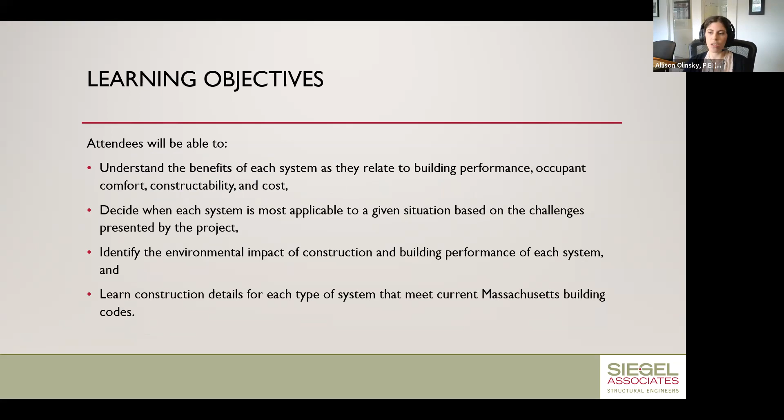So the learning objectives from this presentation are that you're all able to understand the benefits for each system as they relate to building performance, occupant comfort, constructability, and cost. You'll also be able to decide when each system is most appropriate for a given project based on the specific challenges presented. You'll be able to identify the environmental impact of construction and also the final building performance of each system. And you'll also learn some construction details that are code compliant.

So one challenge that you might encounter in building design is creating well-insulated and acoustically separated spaces in a cost-effective way. And one solution is insulated concrete forms, or ICFs. Show me by way of the Zoom thumbs up reaction, or just wave your real human hand around, if you've heard of ICFs. So I've got maybe 3 out of 10 or 20 on here, 4, 5. So maybe we're up to like 8 now. All right, not bad. But I'm here to raise that ratio. I'm wondering how many of you have also designed a building with ICFs before? Give me another thumbs up.

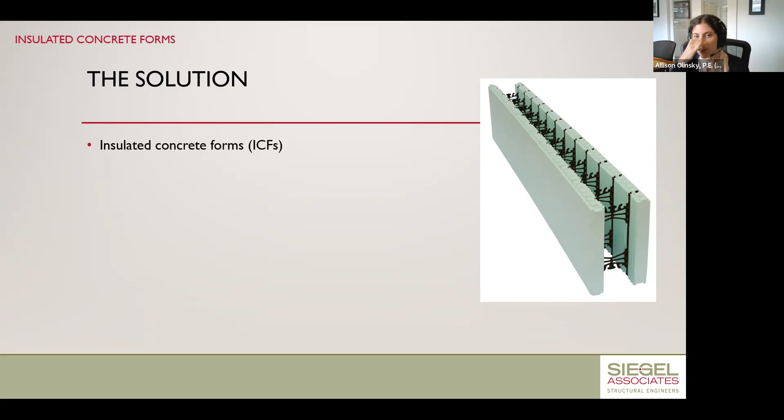So what are ICFs? ICFs consist of 2 layers of foam connected by plastic webs, and then cast-in-place concrete is poured in between them. And I'm calling the foam forms, but they stay in place for the life of the structure, providing insulation and also your air and vapor barrier.

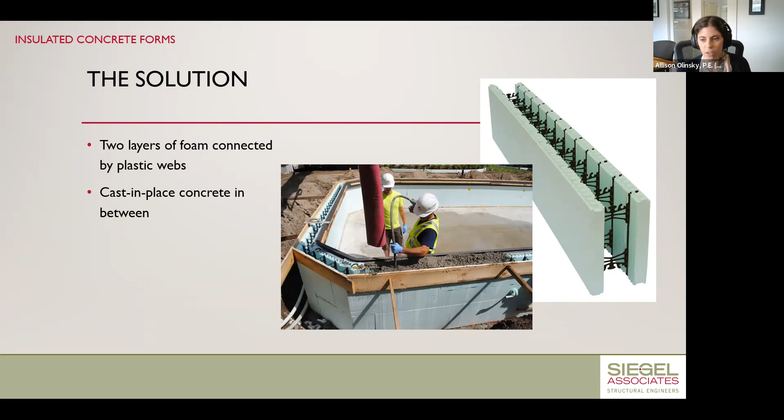I've mentioned some of these benefits already, like the excellent insulation. The foam alone provides about R23, and you can get much more than that with the whole concrete and foam assembly taken monolithically. Regarding acoustics, the concrete mass and foam insulation, especially the concrete though, provide very quiet spaces that are well acoustically separated from the outdoors and also from adjacent rooms or apartments if you were to use this as an interior bearing wall in multifamily residential buildings.

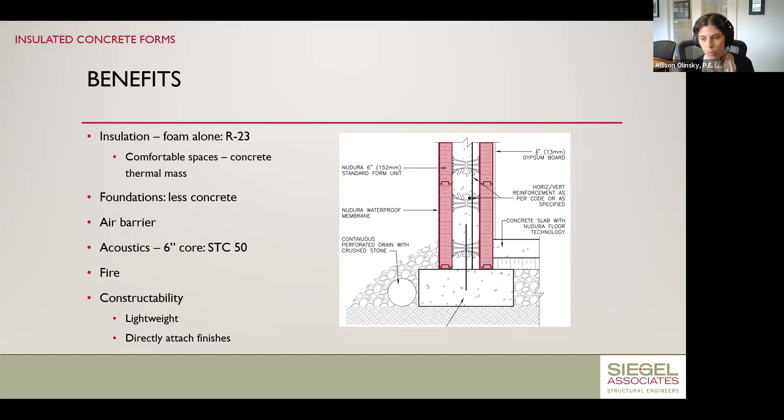So I'm sure that this table means a little bit more to you than it does to me, but with a 6-inch concrete core, you can get an STC rating of 50. It's also easy to achieve a 2-hour fire rating with this construction.

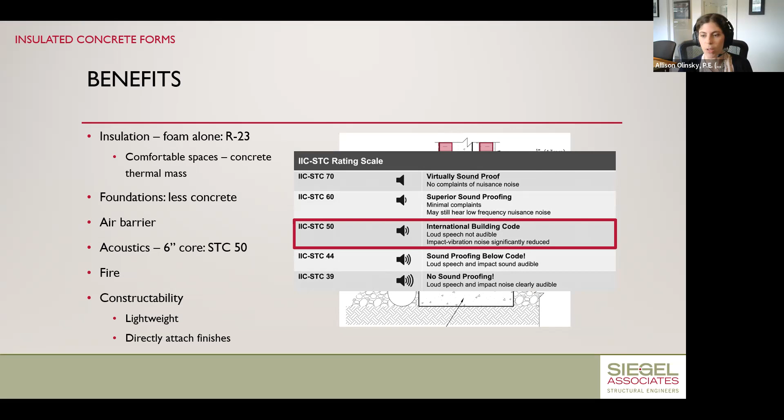And I want to touch on some of the constructability benefits. The forms are lightweight and can be easily carried and placed by one person. The forms made by Nudura, which is just one major manufacturer that we've worked with, are 8 feet long instead of the more standard 4 feet, but they're still so lightweight because it's just foam with some embedded plastic webs, so it can still be easily carried by one person.

Nuduras in particular are also completely reversible, meaning you can install them upside down or backwards any which way, and they all interlock with each other with the embedded plastic webs. And we're not Nudura reps, but they have a large market share locally and they're easy to engage with and they have very strong technical support, but there are other suppliers out there.

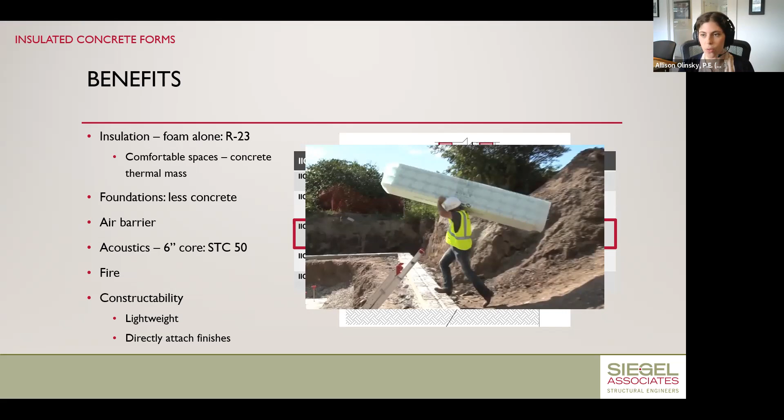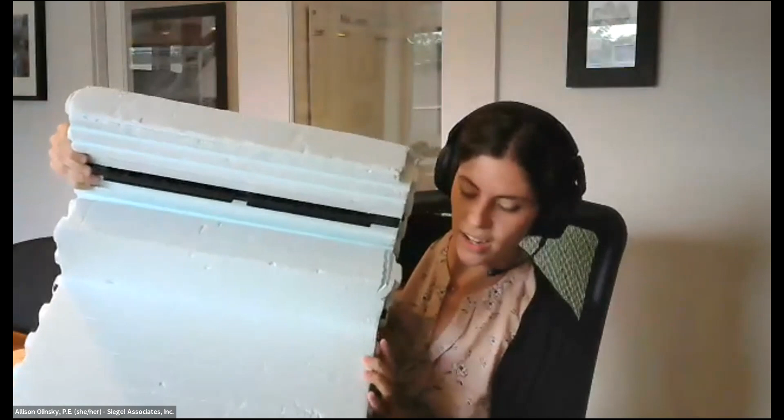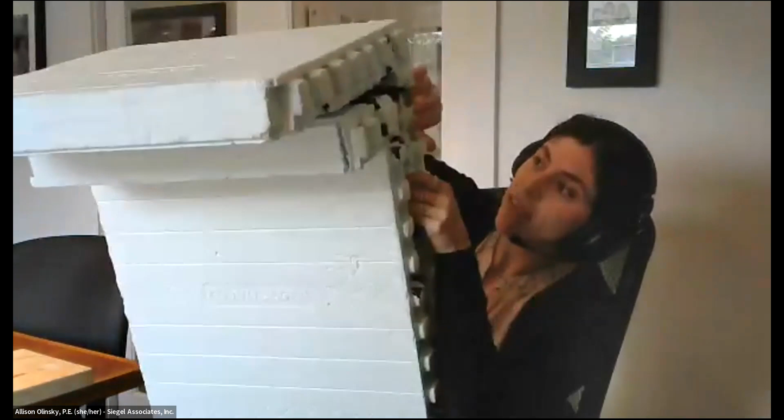So I have a block to show you. I'm going to stop sharing my screen for a moment. All right, so this is a corner block because I couldn't fit an 8-foot block into this office. This is the corner and they all come collapsed and then they fold out. Let's see if I can do this. They just fold out like this. Nifty, right?

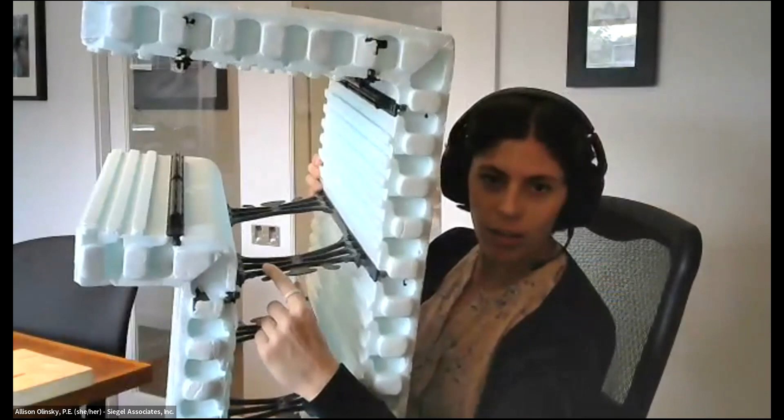You can see these foam nubs, and they're used so you can interlock one on top of the other when you stack them like Lego blocks. These are the embedded plastic webs that you're seeing. Let's see if I can get more of a close-up. I'm holding it upside down. Or as I said, there is no such thing as upside down. So you can see that the webs are symmetrical. So this is the bottom one, but then the top one in the back is the same.

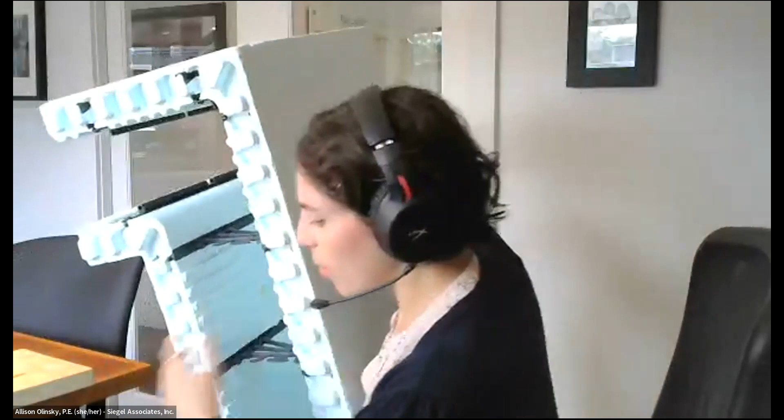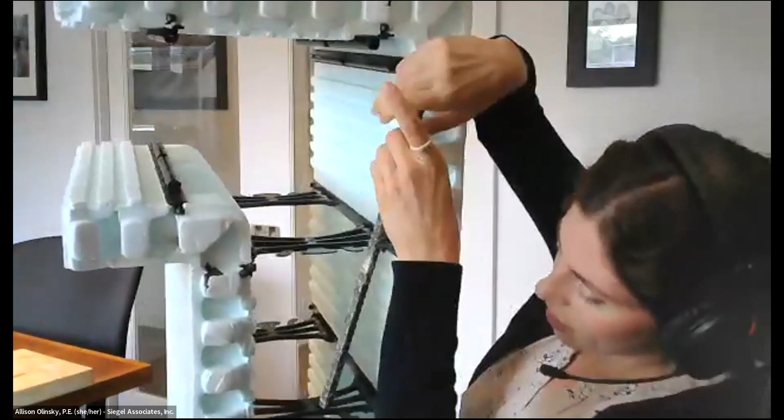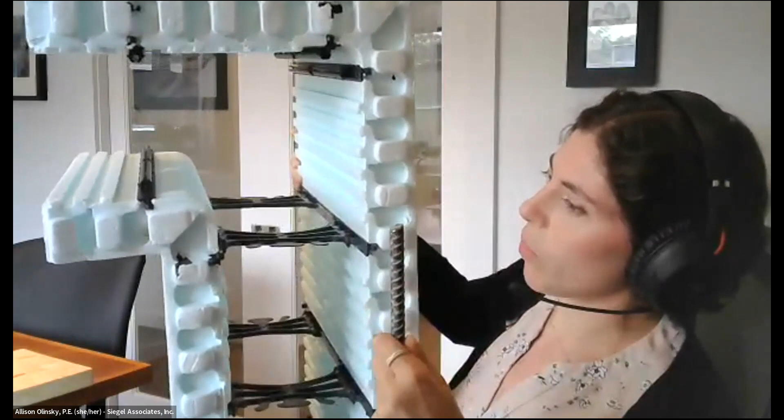So the nubs are for installing the horizontal rebar. So I've got some rebar here. It's much more fun if you could play with it in person. So we got rebar. Can we see this? Yeah. So it just snaps in to the webs. So with your horizontal rebar, you could lay it in alternating. So you would lay the first one here and then on the next higher block, you could lay it right next to it. And then the vertical rebar can just get slid in between them. So it stays up easily.

Okay, I think that's all I want to show you here. Put this guy down. Okay, look at my screen again.

All right, so here is an up close view of the foam. You can see these wavy lines that are stamped in, and those waves correspond with the location of the embedded plastic webs. They're 8 inches on center, so it makes it easy to directly attach your finishes through the foam because you can see where the webs are located. This would include gypsum on the interior, for instance, or brick, wood siding, or stucco on the exterior.

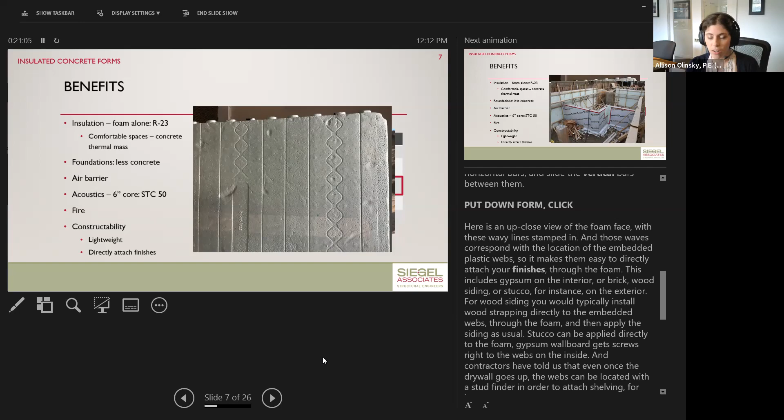For wood siding, you typically install wood strapping, just screw it directly to the embedded webs through the foam, and then apply the siding as usual on top of the strapping. Stucco can be applied directly to the foam, and gypsum wallboard also gets similarly screwed to the webs. And contractors have told us that even once the drywall goes up, the webs can be located with a stud finder in order to attach shelving, for instance.

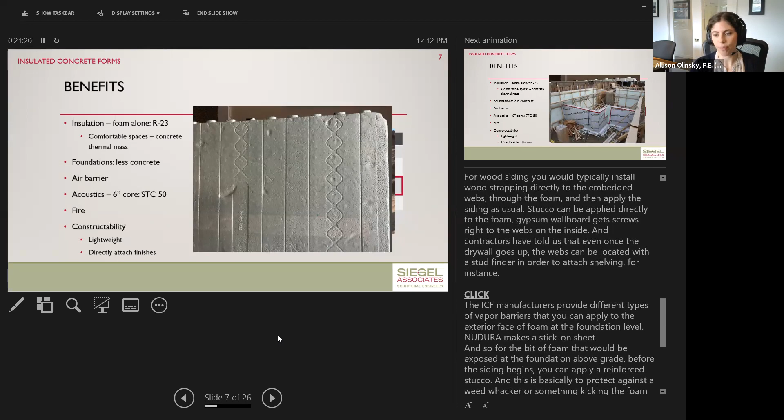The ICF manufacturers provide different types of vapor barriers that you can apply to the exterior face of the foam at the foundation level. I'm not accustomed to seeing any type of vapor barrier being used above grade, but it can be used in that application as well. So Nudura makes a stick-on sheet for the vapor barrier, which is what you're seeing here.

And then you can apply a reinforced stucco for the bit of foam that would be exposed at the foundation above grade. There are a number of different ways you could address it, but that's basically to protect the foam against a weed whacker or something just kicking the foam at that grade level.

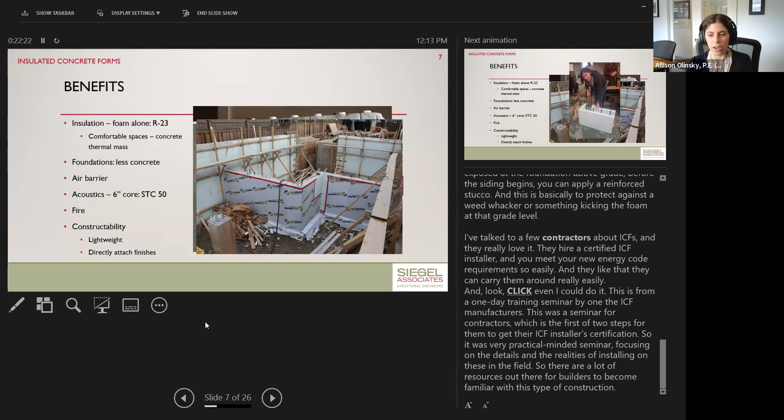I've talked to a few contractors about ICFs and they really love it. They just hire a certified ICF installer and they meet their new energy code requirements so easily. And they like that they can carry them around very easily. And look, even I could do it.

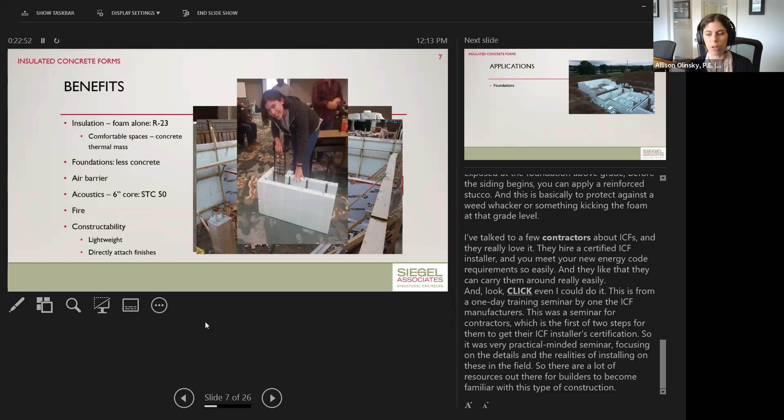This picture is from a one-day training seminar that was put on by one of the ICF manufacturers. And this was a seminar for contractors, so it was the first of 2 steps for them to get their ICF installer certification. So it's a very practical minded seminar focusing on the details and the realities of installing these in the field. So it's good to know that there are a lot of resources out there for builders to become familiar with this type of construction.

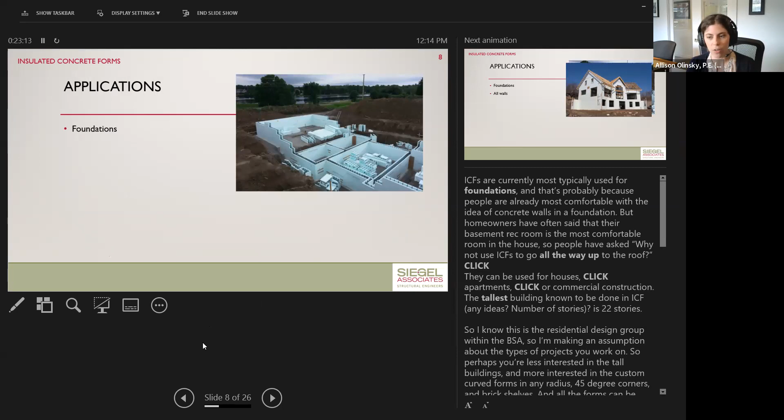ICFs are currently most typically used for foundations, and that's probably because people are already most comfortable with the idea of concrete walls in a foundation, but homeowners have often said that their basement rec room, for instance, is the most comfortable room in their house. So people have asked, well, why not use ICFs to go all the way up to the roof? And that is exactly what we're seeing.

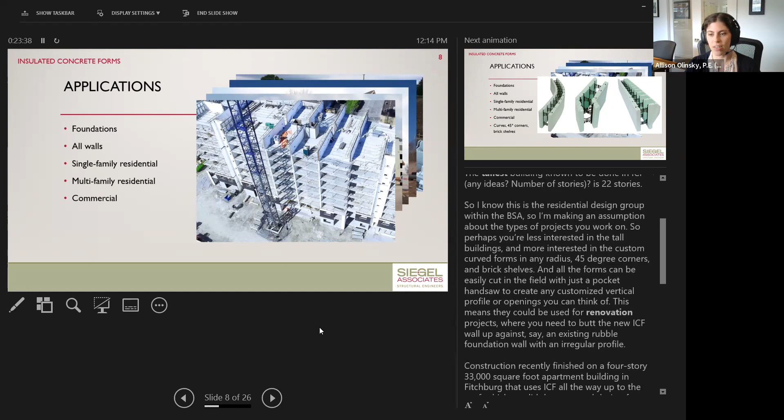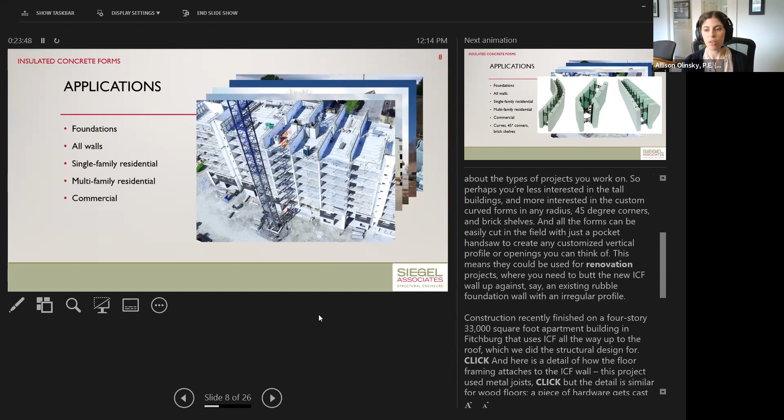They can be used for houses, apartments, or commercial construction. The tallest building to be done in ICFs is 22 stories tall. But I know this is the residential design group within the BSA, so I will make an assumption about the types of projects you work on. So perhaps you're less interested in the tall buildings and more interested in the custom curved forms in any radius, 45-degree corners, and brick shelves.

And all the forms can be easily cut in the field with just a little pocket handsaw, maybe 12 inches long, to create any customized vertical profile or openings you can think of. This means they could also be a good fit for renovation projects where, say, you would need to butt the new ICF wall up against an existing rubble foundation wall with an irregular profile.

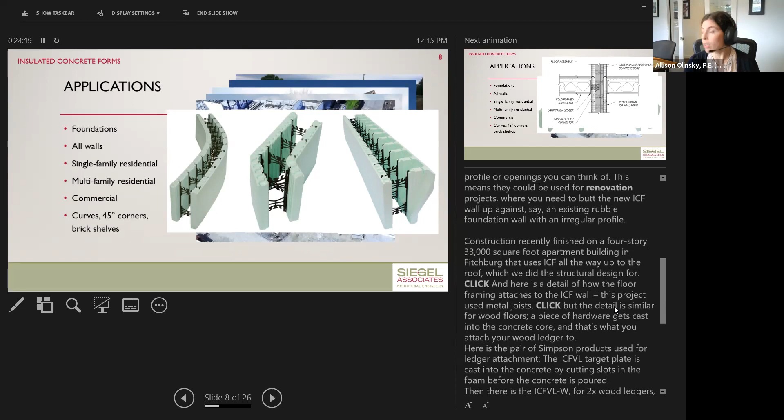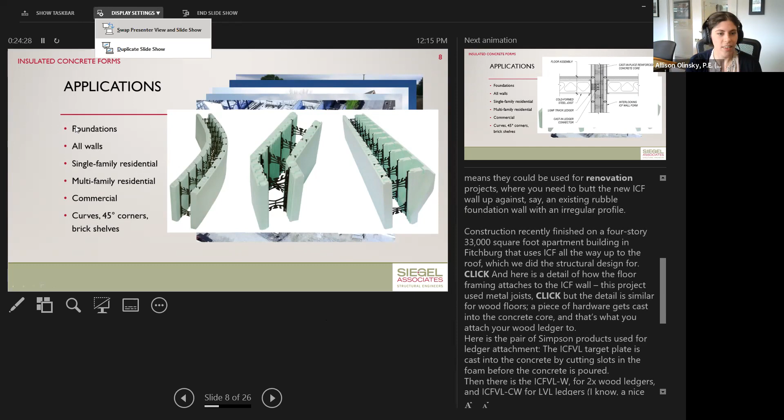Thank you. All right, I was told my script was up. You can see my cheat sheet. All right, here we go.

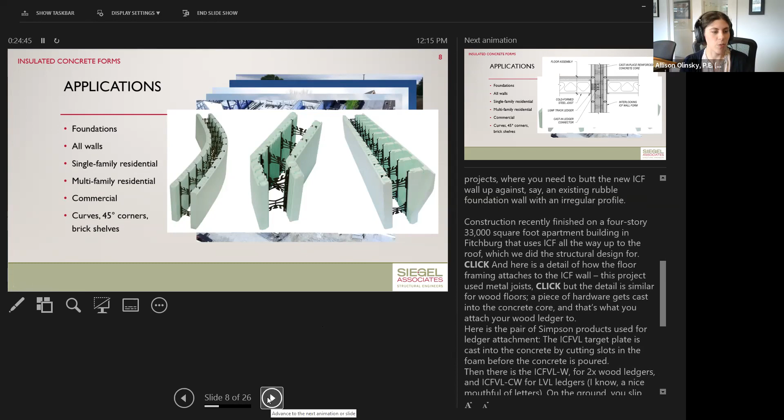So construction recently finished on a 4-story, 33,000 square foot apartment building in Fitchburg that uses ICFs all the way up to the roof. And here's a detail of how the floor framing attaches to the ICF wall. This project used metal joists, but the detail is similar for wood floors.

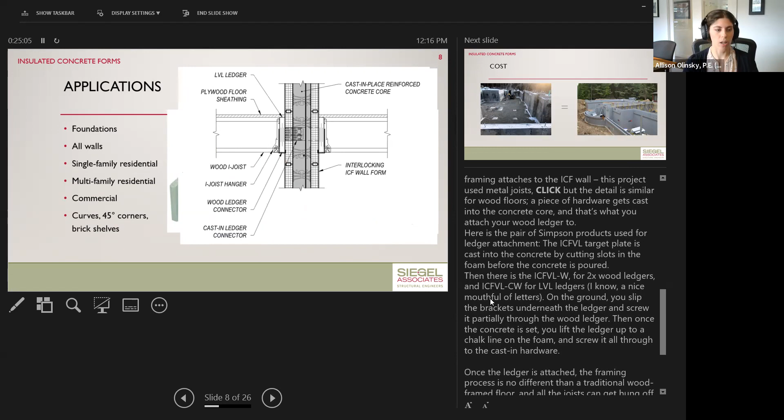So the process is as follows. There's a pair of Simpson products used for ledger attachment. This is the ICF VL target plate that gets cast into the wall. They would call it an ICF VL-W for 2x wood ledgers or ICF VL-CW, say that 5 times fast, for LVL ledgers. So the CW would stand for composite wood.

So on the ground, you would slip your... here we go. This is the second piece in the pair of brackets. So on the ground, you would just slide this shelf underneath your wood ledger and screw through halfway so that the screws aren't coming out the back here.

Then the target plate gets cast into the ICF wall. You can just kind of tap it against the foam and the tabs leave marks on the foam. And then you take your handsaw, cut the little notches, slide it in. Then the concrete gets poured and this gets locked in place. So once this is up, you can lift your ledger up that's attached to the shelf, and it all gets just screwed through to the target plate.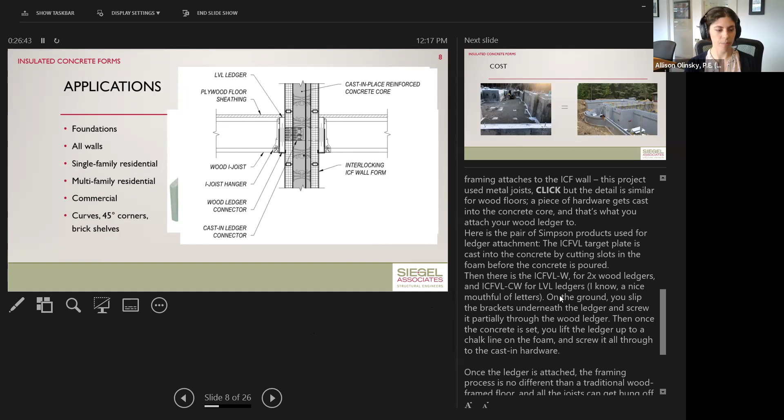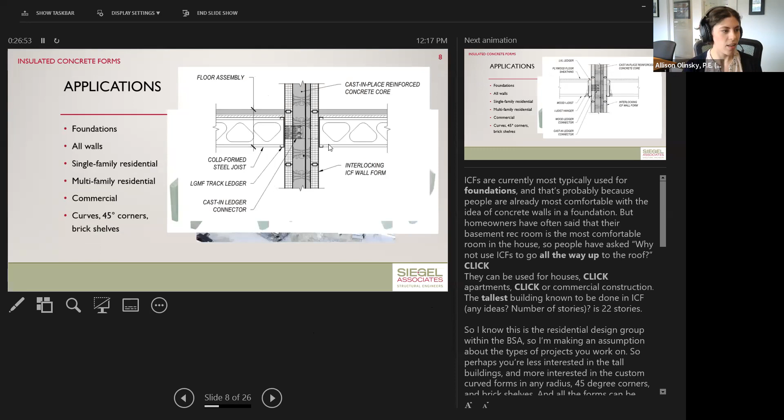Make sense? So once your ledger is up, the floor framing is not unlike typical wood framed floor construction, where the joists just get hung from the face of the ledger. And here's some photos of the apartment building we did in Fitchburg. Oh, I think they got lost here. I can share those at the end.

But the apartment building we did in Fitchburg was a 2-story building with wood roof trusses, and there were wood balconies on the outside, a steel stair in the lobby, and the wood roof trusses just sat on top of the ICF wall and got attached, similar to the target plate, with light gauge steel tabs that were cast into the top of the wall and then screwed through to the side of the truss.

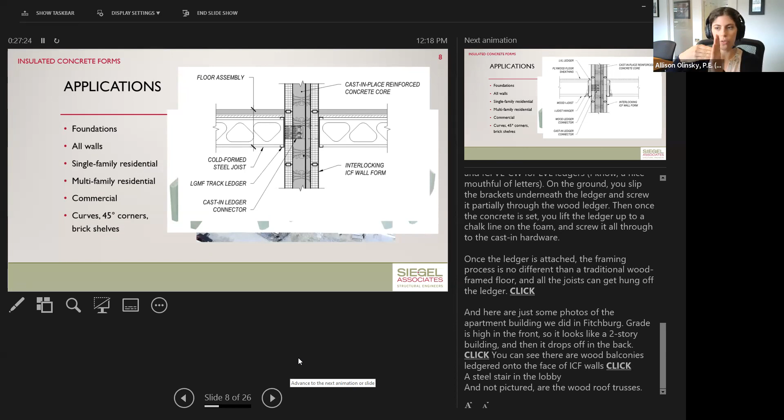So let's talk about cost. For foundations, contractors have told us that ICFs are completely comparable in cost to conventional formed walls if you count the concrete only. But the difference is that the ICFs also come with the insulation. So compared to a foundation for a finished basement where you're adding a stud wall and insulation anyway to the inside face, ICFs then come in 5 to 10% less expensive.

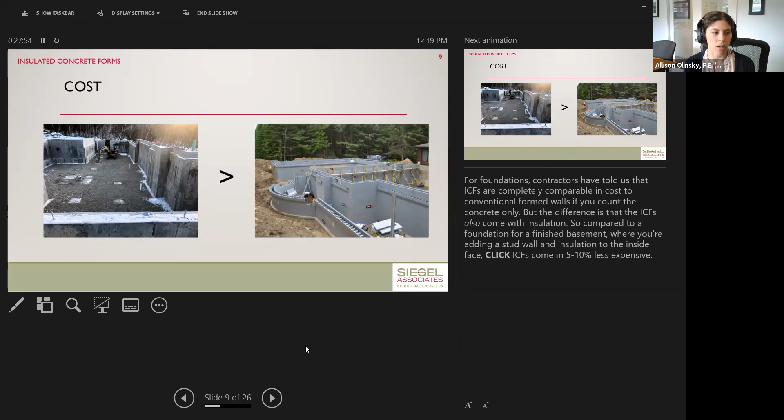The relative cost compared to above grade walls is pretty interesting to me, since it's changed a lot since I first made this presentation back in 2019. So there's an ICF supplier that we work with that estimated back then that it was about 3 to 5% more expensive than a 2x6 wood frame wall with just, say, R21 fiberglass insulation. And then the minute you deviated from that to get a better insulated wall, either with a double stud wall, closed cell spray foam, or zip system insulation, it became comparable in cost or cheaper to go with ICFs.

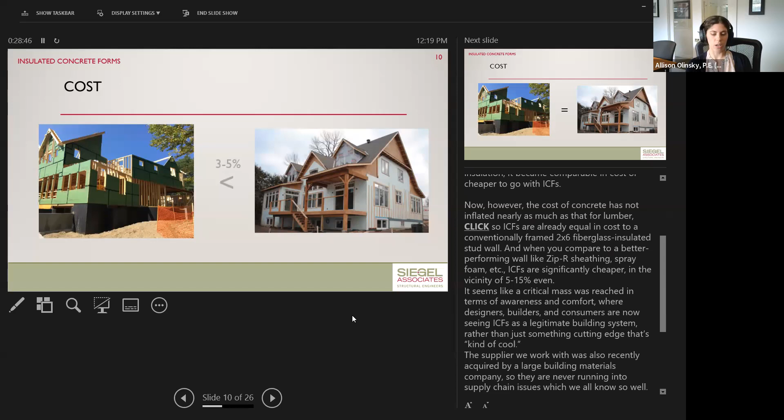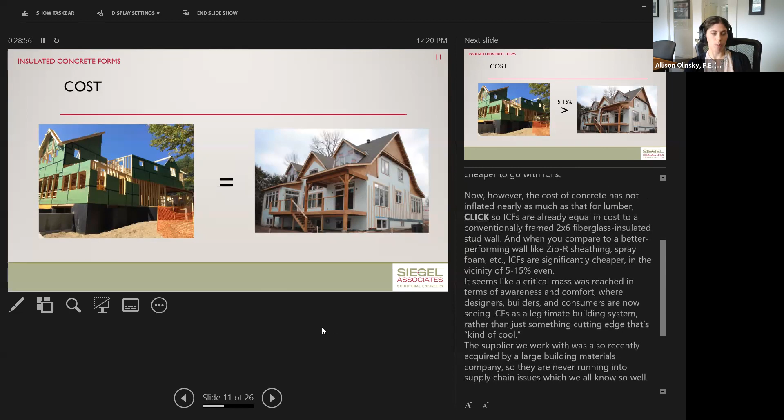Now, however, the cost of concrete has not inflated nearly as much as that for lumber, so ICFs are already equal in cost to that for a conventionally framed 2x6 fiberglass insulated stud wall. And when you compare to a better performing wall like a Zip-R sheathing, spray foam, etc., ICFs are significantly cheaper, in the vicinity of 5 to 15% even.

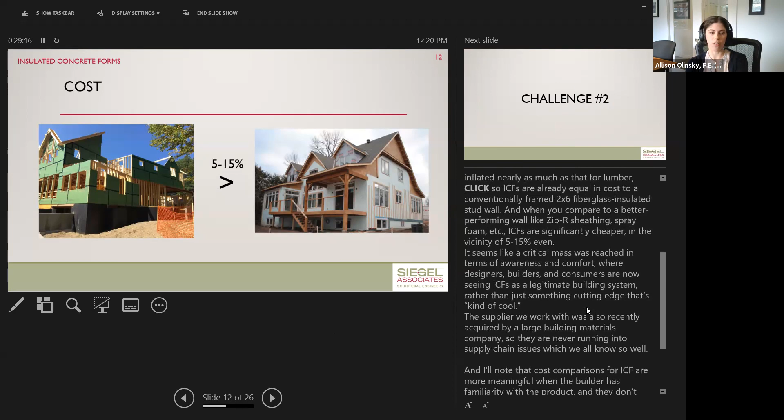So it seems like a critical mass was reached in terms of awareness and comfort, where builders, designers, and also the general public of consumers are now seeing ICFs as a legitimate building system instead of something cutting edge that was just kind of cool, but then you would go with the conventional system once it came down to construction. The supplier we work with was also recently acquired by a large building materials company, so they're never running into those supply chain issues, which we all know so well.

And I'll note that cost comparisons for ICF are most meaningful when the builder has familiarity with the product and they don't give a surcharge due to their discomfort with this new system. All right, so ICFs also reduce the number of trades on a job, because they include structural, insulation, air and vapor barrier, and fastening for your interior and exterior finishes all in one system. It's another reason that contractors like them.

All right, number 2. Another challenge you might face as a designer is keeping projects in a tight construction schedule, particularly with regards to foundations. For smaller structures that you might ordinarily build on sonotubes, you have to excavate the site, pour the concrete, wait for an inspection, backfill, and only then can you start to build your superstructure. In addition, concrete piers with sonotubes carry a significant price per pier. Get to that a little more later.

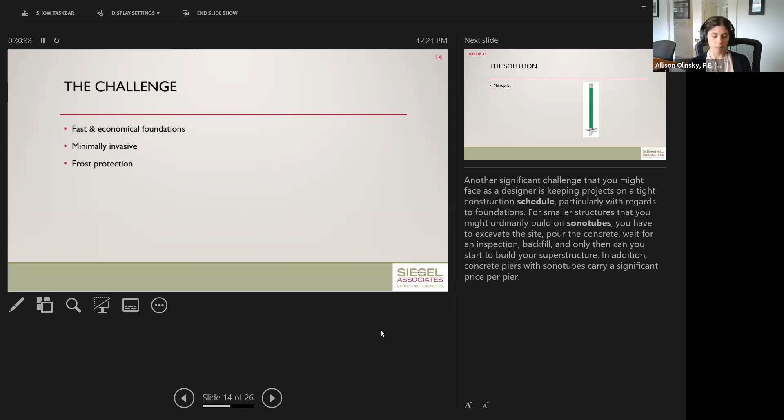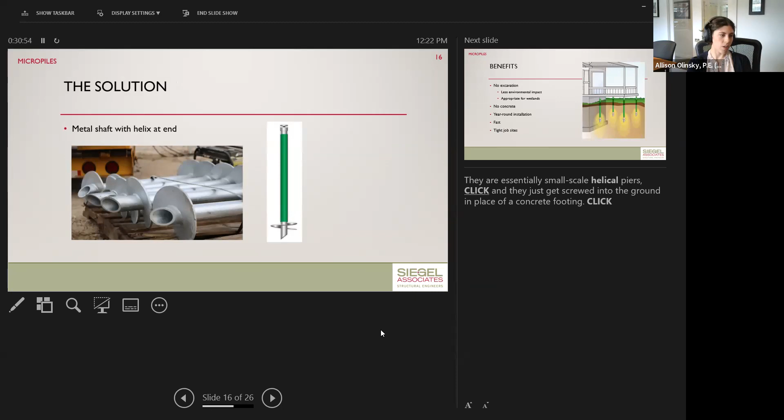And one great solution is micropiles. They're essentially very small scale helical piers, and they just get screwed into the ground in place of a concrete footing. So here we're seeing a shaft with just a single helix at the end. For many applications, they don't require any excavation, so there's minimal site disturbance. A contractor I talked to told me about how they were able to avoid taking out some large trees on a job by just installing the pier right next to the tree. You don't need concrete, but it's still resistant to frost heave, just like a traditional footing. And since there's no concrete, you can easily install them year round.

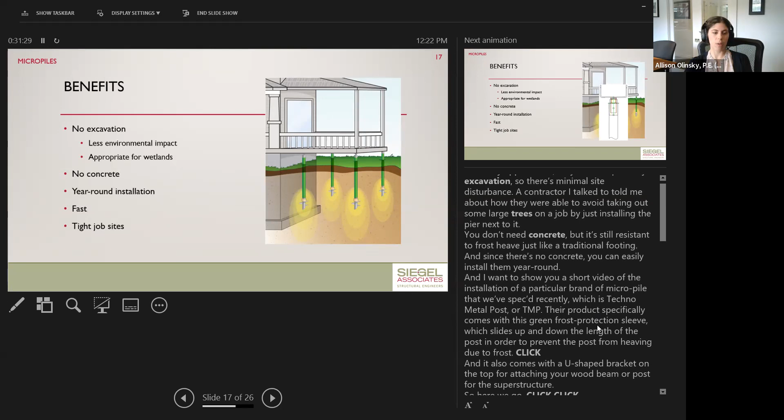And I want to show you a short video of the installation of a particular brand of micropile that we've spec'd recently, which is Techno Metal Post, or TMP. Their product specifically comes with this green frost protection sleeve, which slides up and down the length of the post in order to prevent the post from heaving due to frost. So how that works is just that the sleeve can slide up and down the post. So if you picture the ground freezing and heaving around the post, it'll only grab onto the sleeve and bring that up and down instead of bringing the post and the superstructure with it.

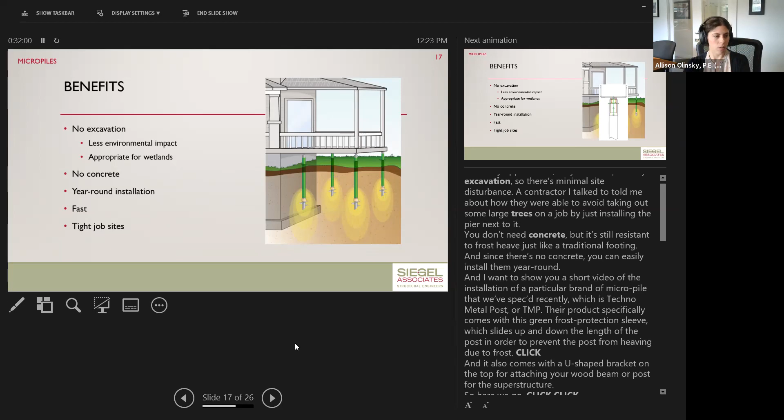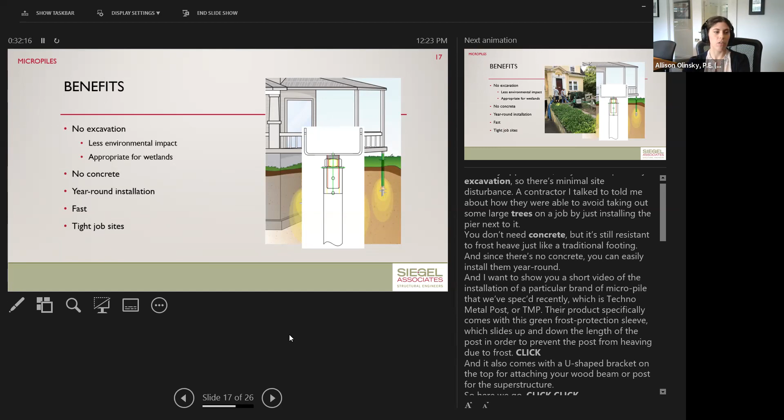It also comes with a standard U-shaped bracket on the top of the post for attaching your wood beam or post for the superstructure, but Techno Metal Post provides all manner of top brackets, including just a flat horizontal plate for maximum flexibility.

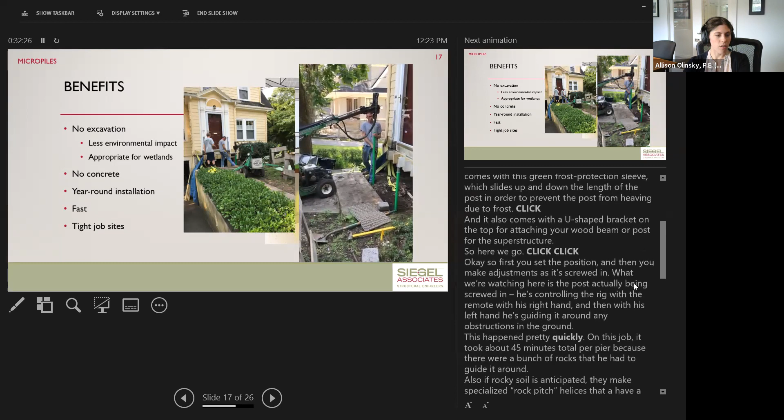All right, so here we go. So first he's setting the position and then making adjustments as it's screwed in. So what we're watching here is the post actually being screwed in. This is just one guy. He's controlling the rig with the remote in his right hand. And then with his left hand, he's guiding it around any obstructions in the ground. And this happened pretty quickly. On this job, it took about 45 minutes total per pier because there are a bunch of rocks in the ground that he had to guide it around.

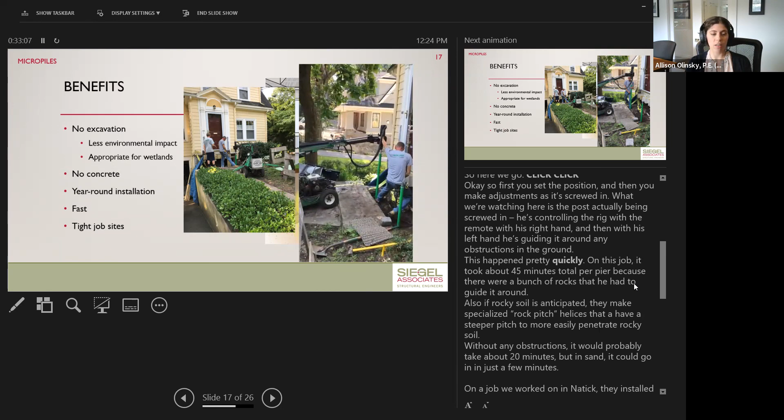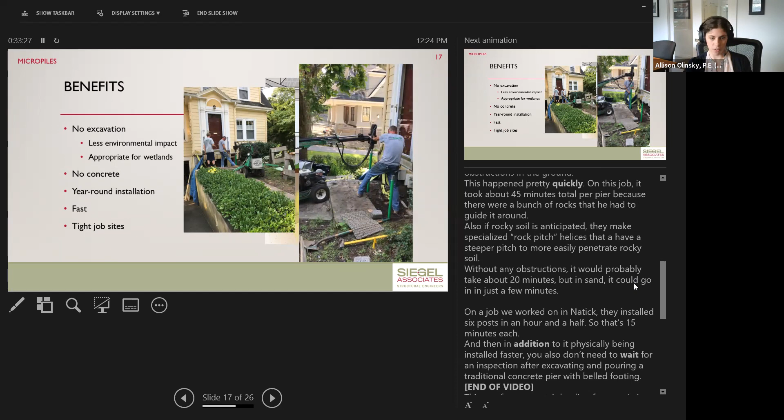But if rocky soil is anticipated, they make a specialized rock pitch helix that has a steeper pitch to more easily penetrate the rocky soil. Without any obstructions, it would probably take about 20 minutes. And in sand, for instance, each post could go in just a few minutes. On a job we worked on in Natick, they installed 6 posts in an hour and a half. So that's just 15 minutes each. And then in addition to it physically being installed faster, you also don't need to wait for an inspection after excavating and pouring a traditional concrete pier with a belled footing. So this is for a new stair landing for an existing.

Can you guys hear me?

All right. This is for a new stair landing for an existing house. The micropiles are great for tight job sites because you don't need to have a concrete pump truck. And you can see that the installation machinery, especially for the smallest size of posts, is quite small. This is a rig. Their big advertising claim is that they can fit through a standard size gate in a fence.

So they were a great fit for this project in particular because there's an existing retaining wall on site and they didn't have to take out the existing walkway up to the house. So you can imagine how disruptive this work would be if a backhoe had to be used for excavating a pier and big footings. They'd have to take out all the plantings and the walk. You might have to start worrying about messing with the retaining wall.

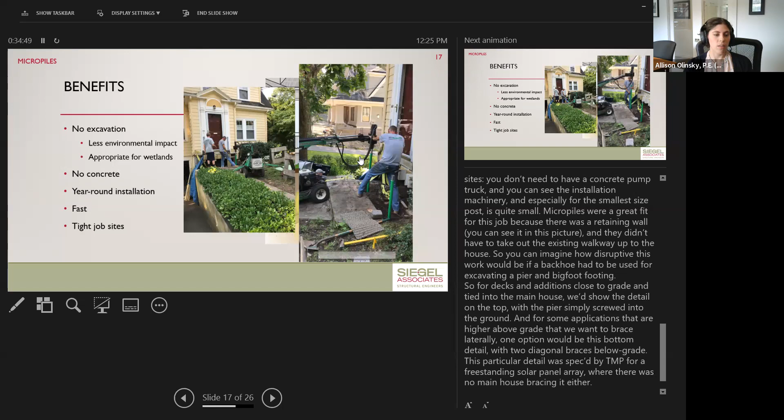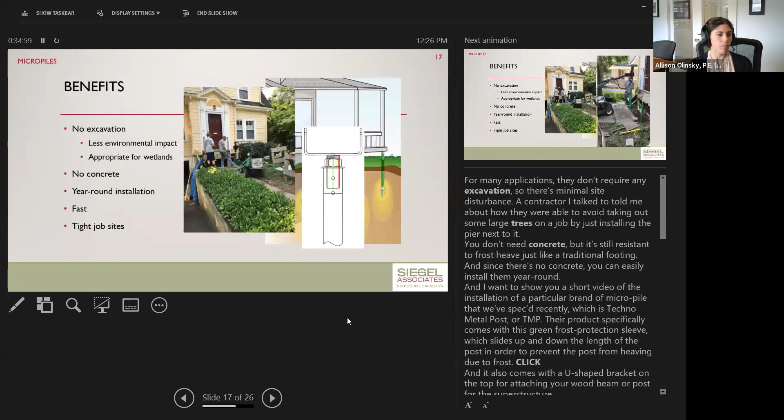So for decks and additions close to grade, this is a really great solution, and we just show the detail on top. Where are those details? When they're close to grade, we would just show a detail where the post just sticks up out of the ground.

But for other applications that are higher above grade, say this is a deck over a walkout basement where you have posts that are 8 feet tall going down onto a Techno Metal Post. For those applications, we'd want to provide some bracing laterally if it's not well tied into the main house. One option is providing diagonal braces below grade. Basically, they just come in with very small scale posts, and alongside the main post, they'll install diagonals. Kind of think of them as buttresses, bracing the top of the post near grade.

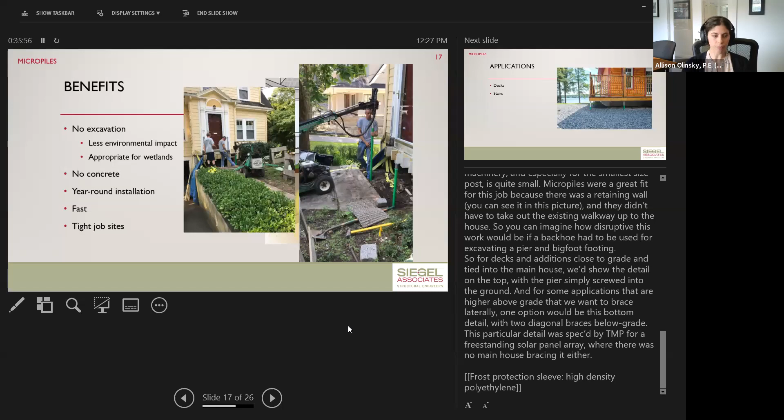Micropiles are particularly useful for small projects or portions of projects like decks, stairs, boardwalks, and sunroom or screen porch additions, but they can also be used for 2- and 3-story construction. The largest project I know of to be done with Techno Metal Post in particular is a 4-story office building, which was all new construction in Canada. TMP is originally a Canadian company, but now they have offices and local installers all over North America and beyond. We could also use micropiles with grade beams if you wanted a continuous foundation approach. It'd just be a matter of having the right cap connection.

And just to give you a sense of the capacities of these things, here's a load table in pounds. I'll walk you through some of these numbers. For the smallest size post, a P1, it's a nominal 1-inch diameter, so it's an actual 2-inch outer diameter. They have about 7,000 pounds of capacity in compression. And then we jump up to almost 34,000 pounds for the mid-size post, which they call a P3.

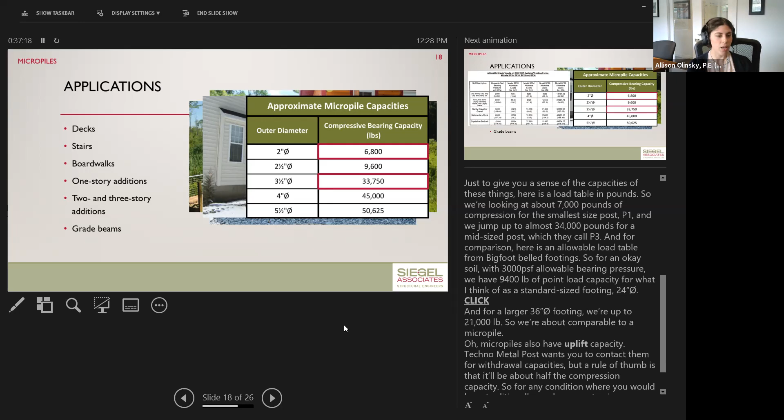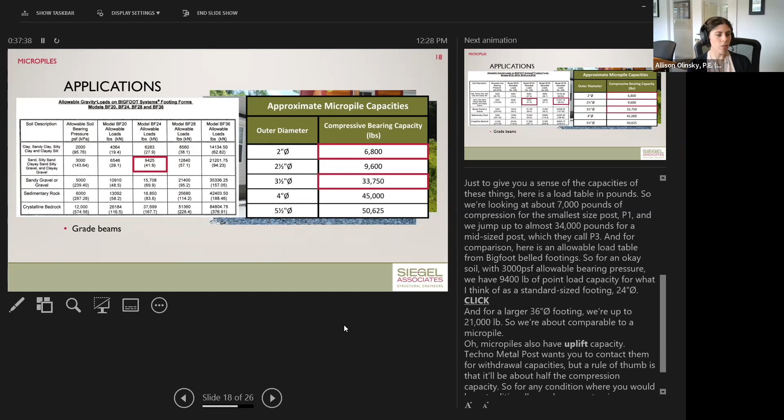And for comparison, here's an allowable load table from Bigfoot belled footings. For an okay soil with 3,000 PSF allowable bearing pressure, we have 9,400 pounds of point load capacity for what I think of as a standard size footing, which is 24 inches in diameter. And then for a larger 36-inch diameter footing, we're up to 21,000 pounds. So we are about comparable to the load capacities that you get for a micropile.

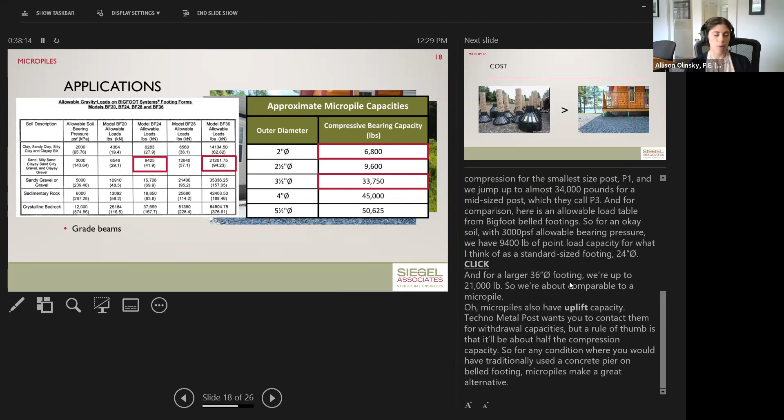And micropiles have uplift capacity, which a belled footing does not. Techno Metal Post wants you to contact them for specific withdrawal capacities, but as a rule of thumb, you get about half of the downward capacity in uplift. So for any condition where you would have traditionally used a concrete pier on a belled footing, micropiles make a great alternative. And our clients really love them, particularly because of the cost.

I'm looking to get some updated information. Some of these numbers are from about 3 years ago. We had a contractor estimate that a typical round concrete pier with a Bigfoot footing, including the excavator doing the excavation, pouring the concrete, waiting for an inspection, and backfilling, costs about $800 to $900 per pier. Maybe that's close to $1,000 or $1,100 now.

And for the job with Techno Metal Post that I showed you the video of, the contractor said that the lightest pier, the P1, good for those smaller applications, costs $120 each. A contractor on a different job said it was about $160, so somewhere in that range. And on a job where we specified the P3 or mid-range size to support a dining room, we were told they cost $400 each. And that one is an updated number.

So that per pier cost is all inclusive. Techno Metal Post comes out and does the installation for that price per pier without any mobilization fee. Steve always says he doesn't know how their business model works. We did have a job recently where they wouldn't come out for a job with just one post, but in the deck job in the video, it was just 2, and they came out for that.

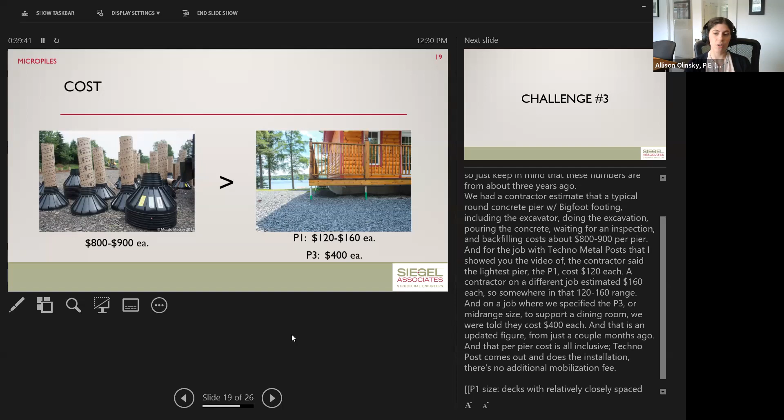All right, moving on to the third and last. So let's say now you want your building to have a continuous concrete foundation as opposed to piers where Techno Metal Post might be a viable option. And you also want your building to have frost protected foundations, obviously. You might also have a high water table or concrete availability concerns.

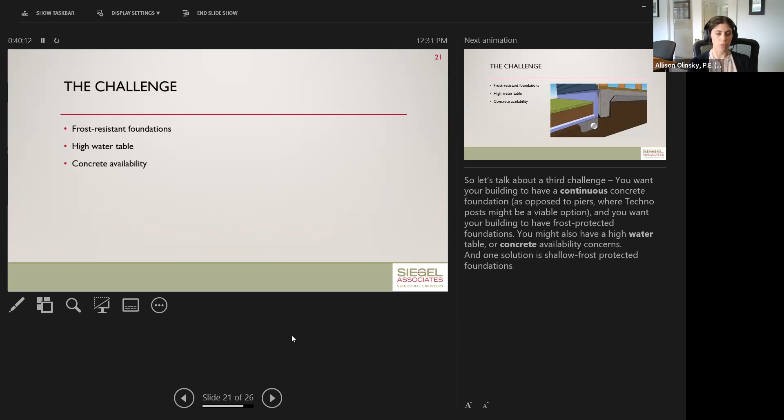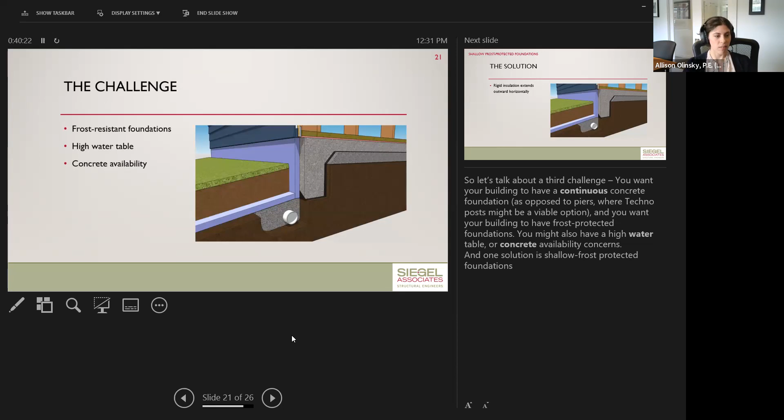And one great solution is a shallow frost protected foundation. Kind of a mouthful, but I don't really have to explain it now. It's kind of self-explanatory in the name, but this is what it looks like. So they consist of either a shallow strip footing or simply a haunch slab, depending on the size of the building, and then rigid insulation in one of a number of different possible arrangements.

The basic idea is that below a certain depth, the earth has a constant temperature year round. In this country, that temperature ranges from about 40 to 80 degrees, depending on your climate. In Massachusetts, it's about 50 degrees. So if the earth is at 50 degrees all the time below a certain depth, and that depth in Massachusetts is 48 inches. I'm sure you guys are familiar with that 4-foot frost depth.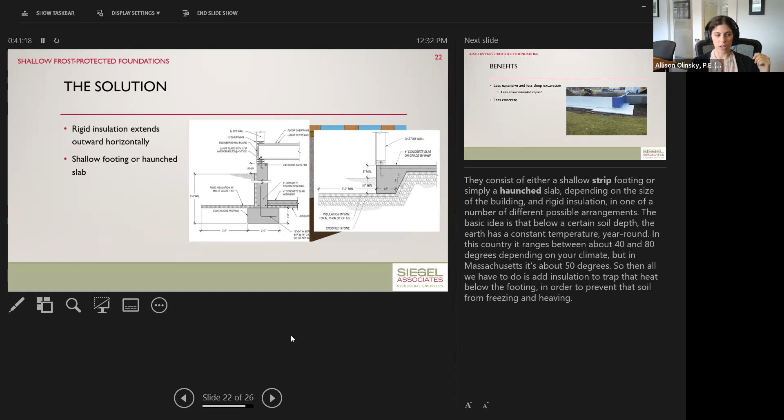So if the ground has this temperature always, all we need to do is add insulation to trap that heat below the footing. If you trap the heat below the footing, you keep the soil warm and you prevent the soil from freezing and heaving. So some of the benefits are pretty self-explanatory as well, because you're not going down as far. You require less excavation and less concrete.

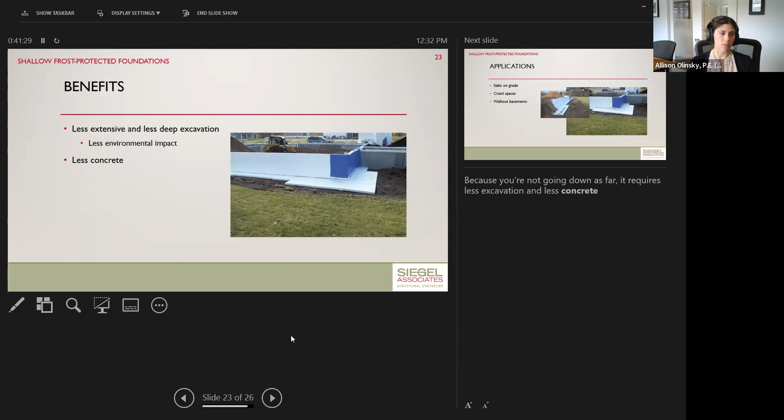Shallow frost-protected foundations were originally conceived as a solution for slabs on grade for heated spaces, and that's primarily what you'll see outlined in the code. But with engineered solutions tailored to your job, we can do more than that. We can use it for unheated slabs on grade, like a garage, an unheated crawl space, or walkout basements.

For walkout basements, it would be very common to use it on that wall over which you would walk out outside of the basement. So this is a great way to meet code for frost protection with less excavation and less concrete than a traditional frost wall, and also to protect the integrity of your structure against frost heave.

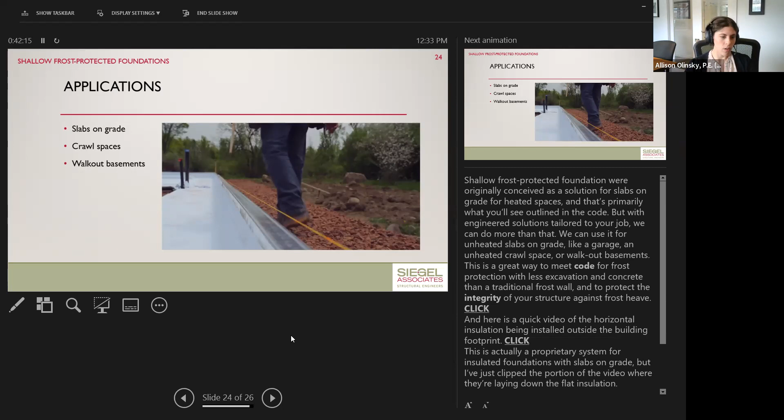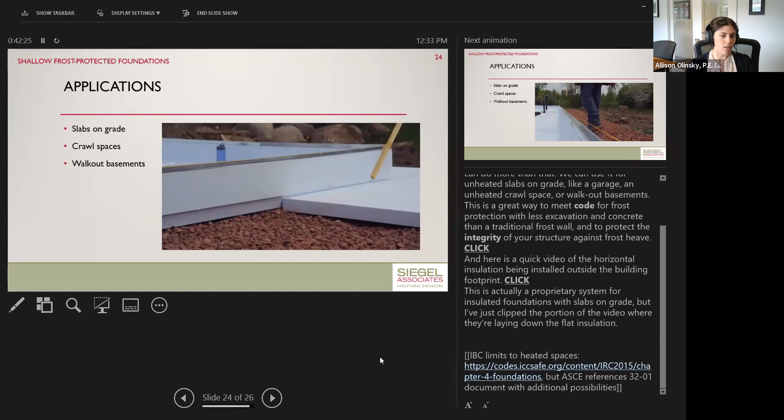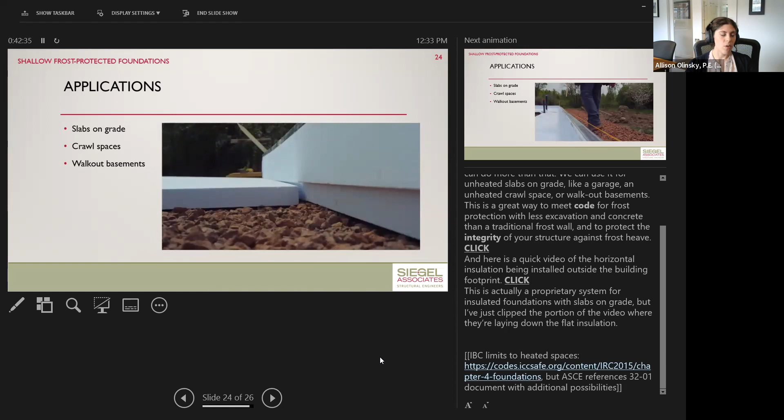This is a quick video of the horizontal insulation being installed outside the building footprint. This video is actually for a proprietary system for insulated foundation with slabs on grade, but I've just clipped the portion of the video where they're laying down the flat insulation. So it's pretty simple. You just come in with the big sheets of foam and lay it flat. And we could tell you based on your application what thickness the foam would need to be and how far out you need to extend it.

We're watching it again. Okay.

So I don't have specific numbers to offer you on the cost of shallow foundations versus traditional, but it's easy to understand why it would be cheaper. There's less of almost everything: less excavation, less form work, less concrete to pour, and less time spent backfilling. And all you have to do is add in the labor of laying the insulation down. But for applications where you're already putting insulation on vertically on the exterior face of the foundation, laying down the horizontal insulation represents pretty minimal added cost.

And in case you're feeling uneasy about not going down to below frost, we had a contractor we work with pretty often use it on his own house, on his garage. And I'll say that he is one of these contractors that likes to do things by the books, not one of the rogue ones you sometimes have to keep an eye on. And he was more than comfortable not going down to below the frost line with this insulation detailing.

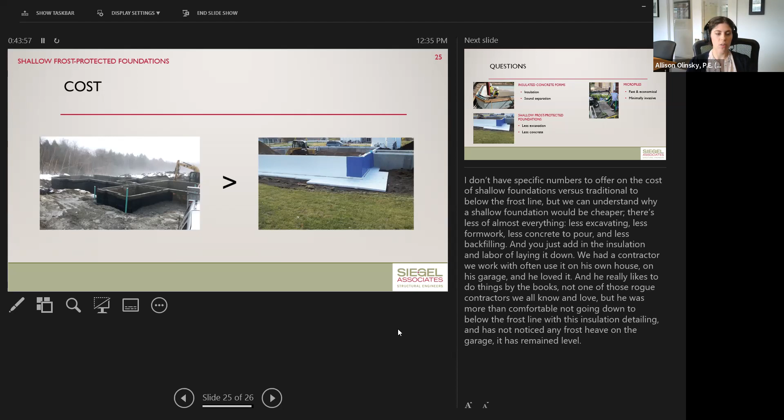And that garage has been in use for probably about 4 or 5 winters now. He hasn't noticed any frost heave on the garage. It's remained level.

So that's what I have for you today. Hopefully the next time you're thinking about designing a well-insulated building, you think of insulated concrete forms or ICFs. Next time you're looking for an economical isolated foundation solution, hopefully you think about micropiles, and you can keep shallow frost protected foundations in the back of your mind.

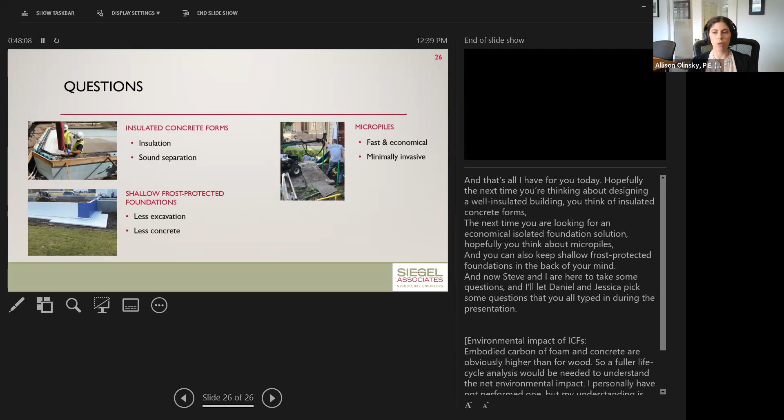So it's not dissimilar from a traditional full-size helical pier, where much of the time you can drop them roughly where you want them to be, and sometimes you can't, and you either try and brute force your way through it, or you move the piles to other locations and then have to adjust the materials that are spanning between the piles. So that would be comparable to a solution that you'd have with other types of pile systems.

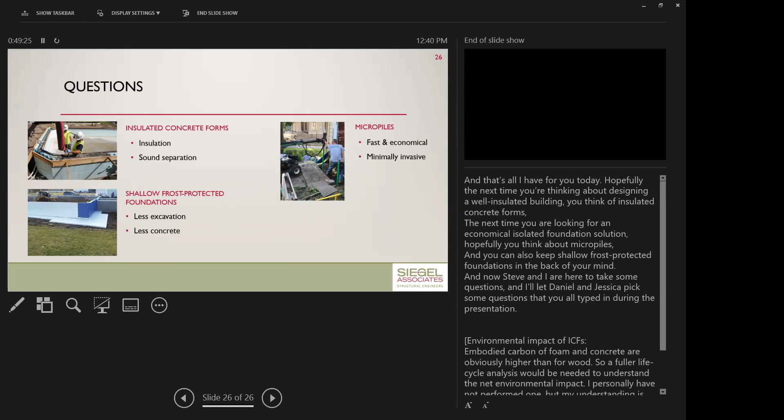Interesting. Andrew, is there a question in the micropile thing in your statement? Have you used these before? I think you said you had. I haven't used micropiles before, but the area above grade is so small in relation to a big sonotube. It seems like they'd be really easy to hide with a skirt board or something like that under a porch, which is great, in addition to everything else Allison said about how quickly they go in and how they're less expensive. It just also seems very easy to sort of make disappear in your architecture.

Yeah, I'll note that this photo was not the final condition. I'm sure they hid those ugly little stubs. And there are some really cool things about using micropiles. Now, I'm going to back up and say one other thing. We've been talking about Techno Metal Posts, which is a specific brand, because they're all over this area. They do a lot of great marketing. They have a lot of good information for us technically. There's another manufacturer and installer in the area called Goliath, and there may be more, but we know that Goliath has been on some of our sites as well. Just so you know, you're not just stuck with one.

But the thing that a lot of our clients are impressed about is that you come in with your installation rig, you drive the piles in the afternoon, you back the machinery off, and a carpenter can come and start to build right on top of it the moment the machinery backs away. And so it's one of the things that's really terrific. You don't have to, again, wait for the concrete to cure.

Well, first you dig a hole and you wait for the building inspector to inspect. Then you pour, you wait for the concrete to cure. Then the concrete folks demobilize, and then the contractor comes back a couple days later and starts the framing. So it's just super fast, super simple, and it's one of those products that a lot of our clients think is too good to be true with the right application. So we have a lot of fun sharing it.

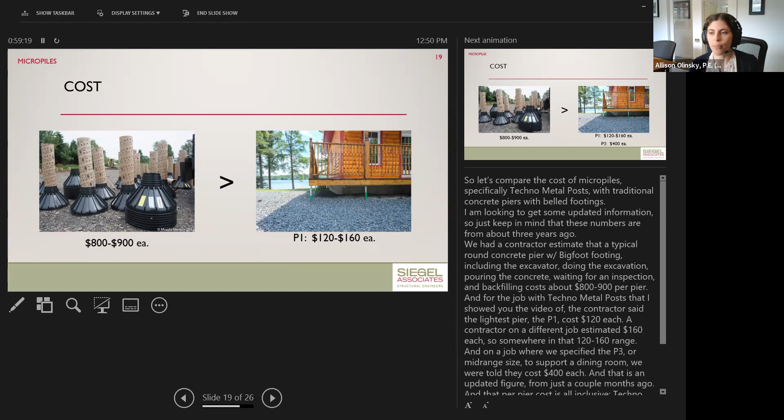Right. And then that leads to the next conversation. Mr. and Mrs. homeowners, you want to have a full basement for a couple extra thousand, right? Exactly. But it could still be useful if it were a walkout, if grade would start to step down on one or more elevations. And could we review again, how far does the insulation have to go out horizontally from the foundation? That one is project specific. It could be on the order of between 2 and 4 feet. Okay.

It's always a concern of mine: what is the condition of the rigid insulation while it's being installed? Is it torn apart because it's been sitting there a while? We have to have our eyes on it as they're backfilling to make sure that it's continuous and that there aren't major chunks taken out of it. Right, but it's not like a rubber roof deck where any minor penetration is a failure. This is not a failure if you've got a little bit of zone where some cold could get down, because you still have a large mass of soil that's insulated and holds the heat.

You were saying that in the New England area, it remains at about 50 degrees? That's right. It's whatever the average annual temperature is in a given zone. It's in the mid 50s, I think, around Eastern Mass. It's probably a touch higher on the Cape, touch lower out in the Berkshires. But pretty quickly you can see that you go down a little bit and the soil doesn't freeze.

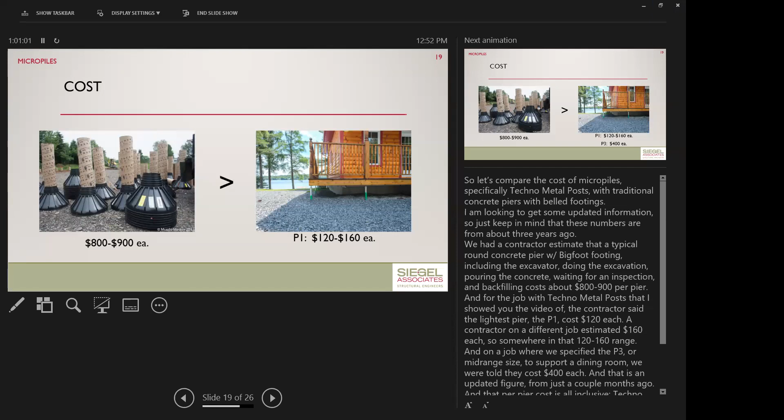It's common for someone to put foundation plantings and the like, but you can also have a driveway going by, and the load from a car tire is still going to be way under the capacity per square foot of a piece of rigid. Great. Okay.

Does anybody else have any questions? I mean, once you talk about these systems, you're like, well, yeah, that makes complete sense. It demystifies it completely. When I'm paging through the magazines and I come across an ICF advertisement, I would always just kind of move beyond it, thinking, oh, I just don't have an application for that. But it really seems like it's very versatile, even in a very conventional sense.

Mm-hmm. Yeah, we've kind of pleasantly had our eyes opened as well, once we actually use all these systems, like, oh yeah, they actually do work. Yeah, and the ICF system, Allison talked a little bit about the contractor training that's available. Most manufacturers also have leveling and plumbing systems, because it's all about getting it precisely located. If you get it precisely located, the whole building goes up cleanly. So you have a little less flexibility.

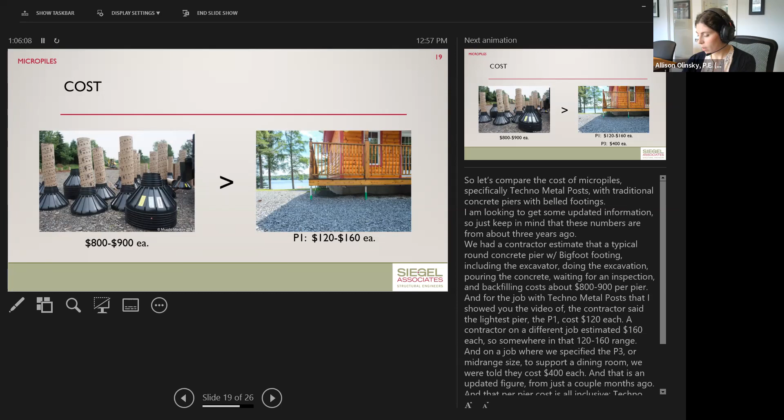Krista had a question. Could you share photos of the Fitchburg project you mentioned earlier? Yeah, I could send them out later with a slide deck if anyone wants. They were part of this presentation. They seem to have left the building. Okay, thank you. Can't find that file. Okay. Yeah, I'll see if I can find them.

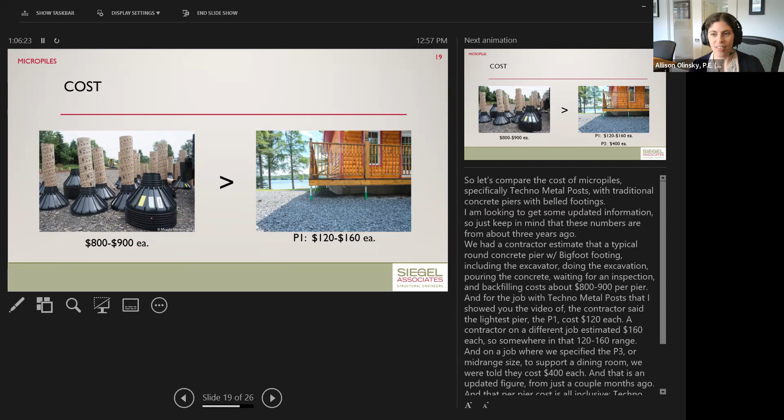Steve, do you want to talk about what you're seeing in terms of residential structure, trends, new things coming down the pipeline? What kind of services are you seeing architects request? Where's your bread and butter? Where are you stretching things in terms of design? Do you see any trends lately?

Well, probably the biggest trend we see across the board is a focus on energy savings and sustainability. There are certain tools in the toolbox of a structural engineer. There's something called advanced framing technique. It's got other titles as well, and it has to do with minimizing the amount of lumber you use in a building. There's a framing factor, which is the percentage of the elevation of a building that has through-wall stud work and plates. As you reduce that, the energy performance of the building goes way up.

So strategies for reducing the amount of lumber in a building is something that we see a lot. We have been starting to talk and starting to investigate methods for reducing the amount of concrete, or the amount of cement in the concrete, because cement production is one of the huge greenhouse gas producers. And so we've been looking at that. We've been getting some inquiries. That involves the batch plant having the right materials to change the composition of the concrete. It involves the contractor knowing where to find it.